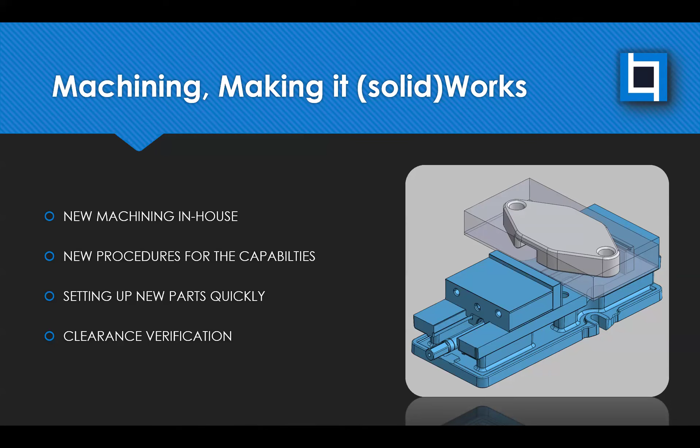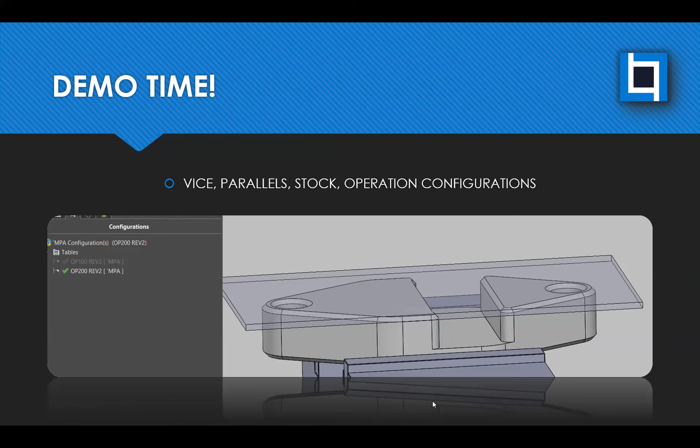But we still do a lot of setup in SolidWorks before exporting, and we do some possibly interesting things to show you guys what we do. So I'm going to go through that a bit, and then most of what I'll go into is just a demo in SolidWorks, talking about how we utilize our vise, parallel, stock, and operation configurations for programming. So I'll go ahead and pull it up here.

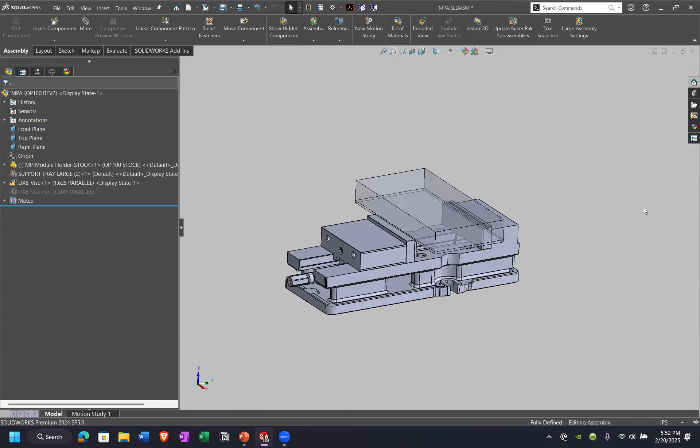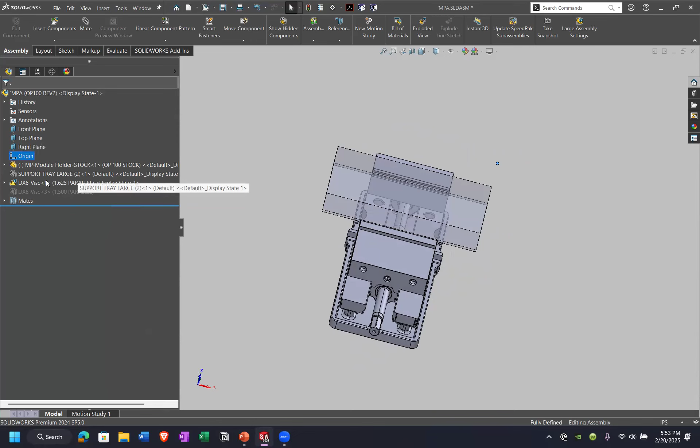This is essentially a model the way it would start. We have a template that looks a lot like this with no part in it—I just hid the part for a second—but this is essentially what we'd open as a starting template for our machine. It's got a piece of stock here, and everything is focused around the stock. The stock is fixed in place on the origin where we want it, which in this case we treat as the top right of the machine bed. Then we have our vise in here, which I'll suppress for a second.

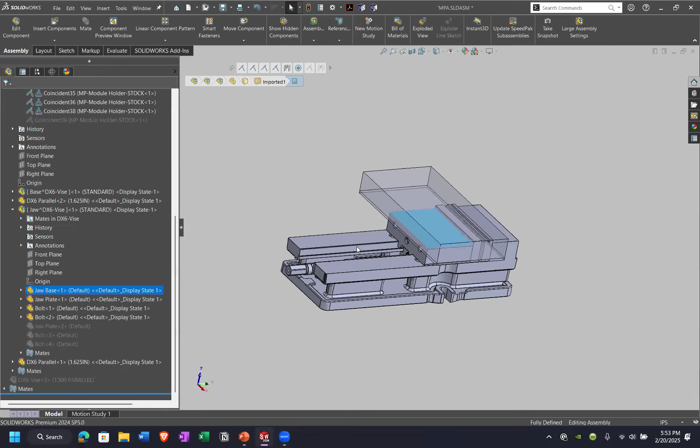It's set up as a flexible model so we can show clamping different objects and move things around as necessary. And just for reference, in case somebody doesn't know, I'll suppress this for a second—if you don't know what flexible is, if you've never used that.

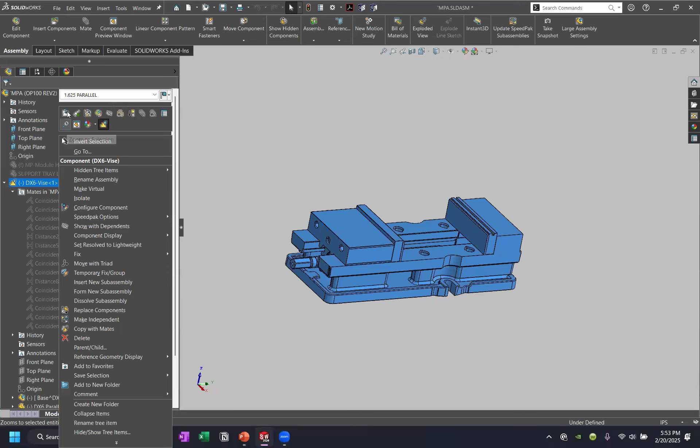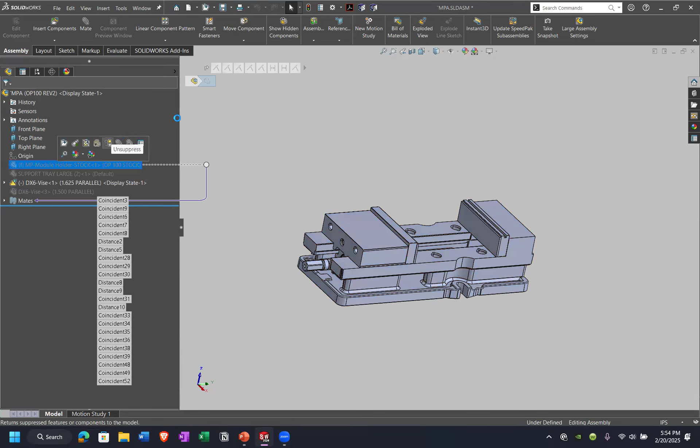That's this button right here, under your quick menu, make subassembly flexible. Essentially that allows you to take something within the assembly and move it around—this is inside this assembly, you can move it. But if you're in a higher level assembly where that would typically be locked in position because it's under a separate subassembly where that mate exists, you can actually make it flexible and it allows it to move like you're in that subassembly. Hopefully that makes sense.

So we move that around. I'm sorry, say that again? Door hinges? Yeah, door hinges and shocks, great examples. Yeah, basically subassemblies you're trying to move in a higher level assembly.

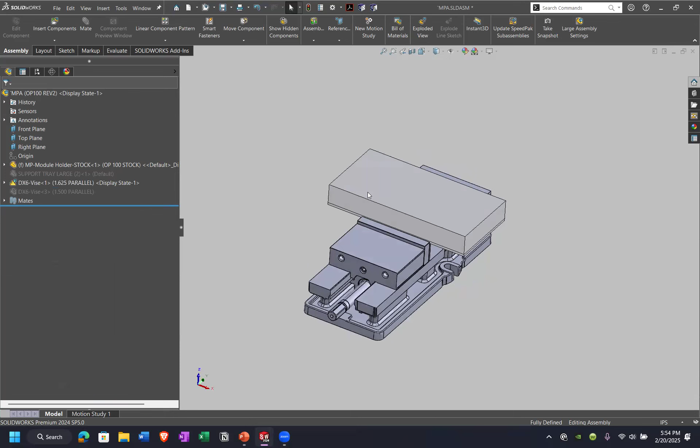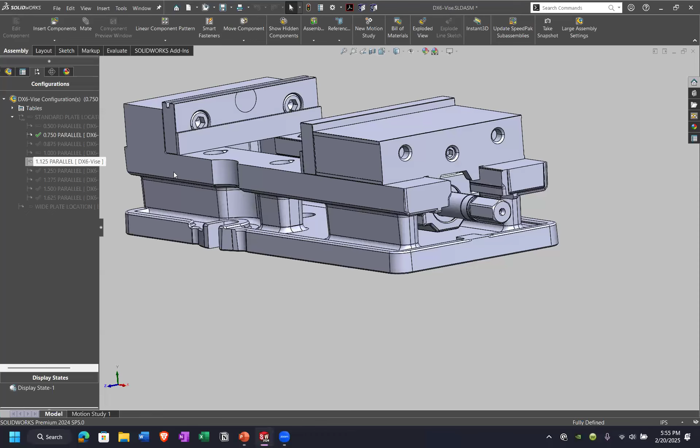So anyway, we have that as a flexible subassembly, and we also have it with multiple configurations built in—it's its own subassembly with built-in parallels for machining. These are our parallels, with different standard heights built into them, so we're basically accommodating all our different tooling already. It's not 100% comprehensive still—we're still working on some processes—but this has a lot of what we typically use for our setups, so we can quickly change to the different parallel configurations we have.

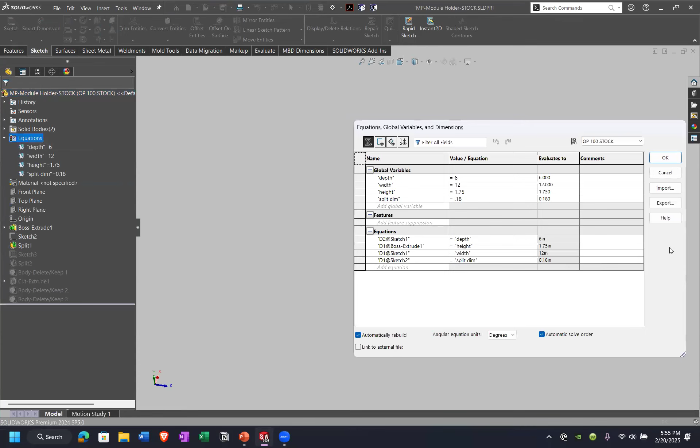For our stock, this is just what it sounds like—it's intended to be a stock piece of material, driven from equations. For example, if I wanted this to be a 12 by 12 for this part, I'd just change that equation, trying to make everything really fast and flexible for us. If this needed to be a 2-inch piece of stock, we just change these variables.

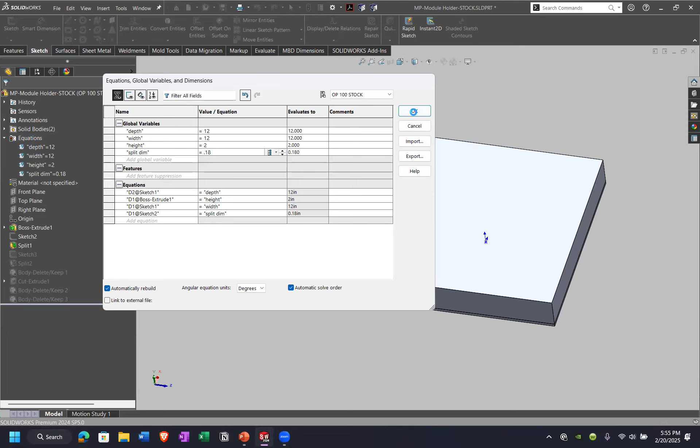One of the useful parameters here is where our split line is, because our split line, in this case, typically needs to be in relation to the part—if I show my part again.

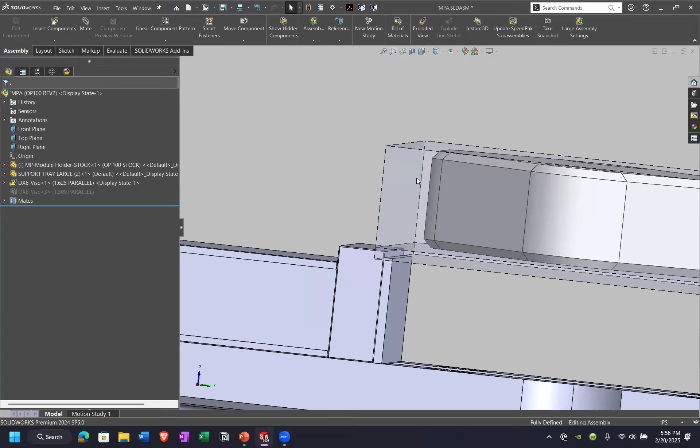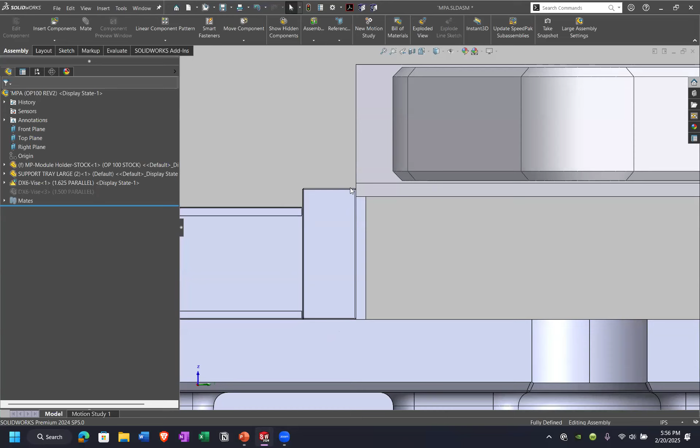The split line needs to be above the part so that we can face it, but above the edge of our vise. We don't want to collide with the vise while we're machining, particularly in this case because we're not machining steel. You especially don't want to hit it when you're machining plastic, because you'll tear up your tool.

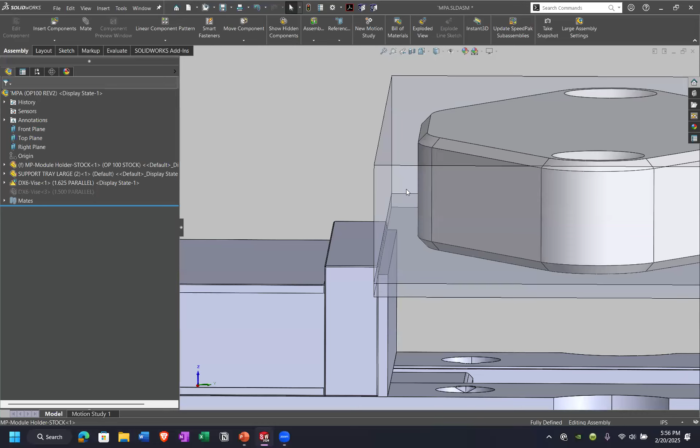So we need to have that line be in the right spot. That's another parameter we control in our stock, where that split line is going to be. For a simple part like this and a simple program like this, that's going to determine where our op1 and op2 split.

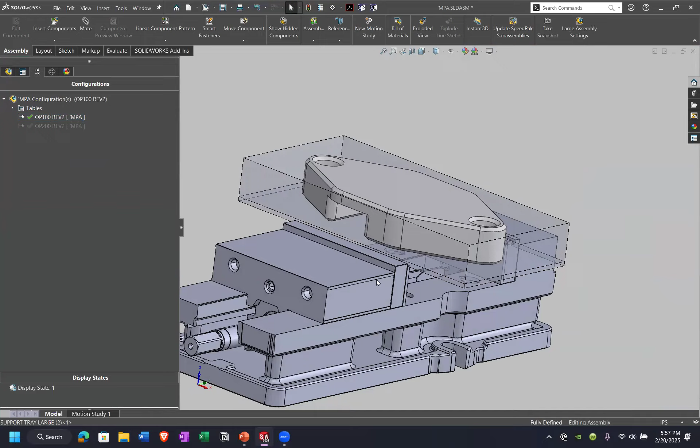With these configurations, we essentially mate our part in here where we're expecting it to sit in relation to the vise and the stock. In this case, I've just centered it on the stock, offset a bit from this top face so that we can actually face it and make sure we're getting a nice flat face, and then above that split line like I was saying.

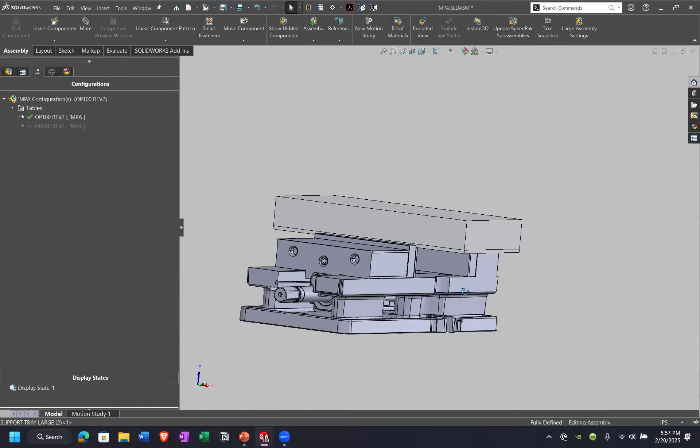Our op1 is essentially cutting that profile from stock, getting that done. Then when we go to op2, we have another vise dropped in, so the other vise is suppressed.

Everything's based around the stock and the part, versus actually treating the vise as the fixed reference. We actually treat the part as fixed, and there are some reasons for that.

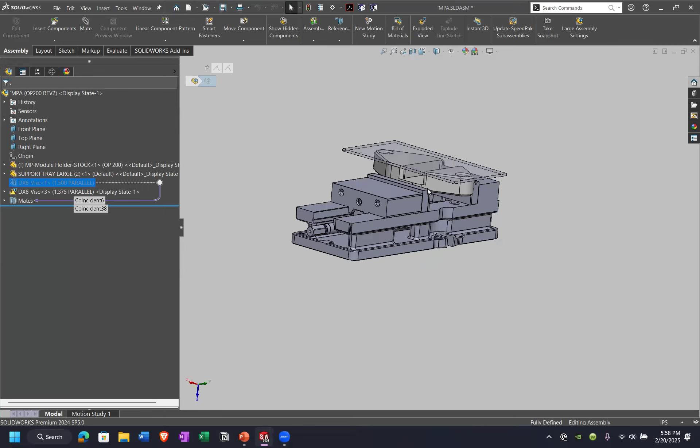It's easier for our pathing when we're importing multiple versions of this, because ultimately these will all get outputted as a step file and then overlaid, considering where the part is going to be and where our machine datum is, because the part is really put in relation to the machine datum.

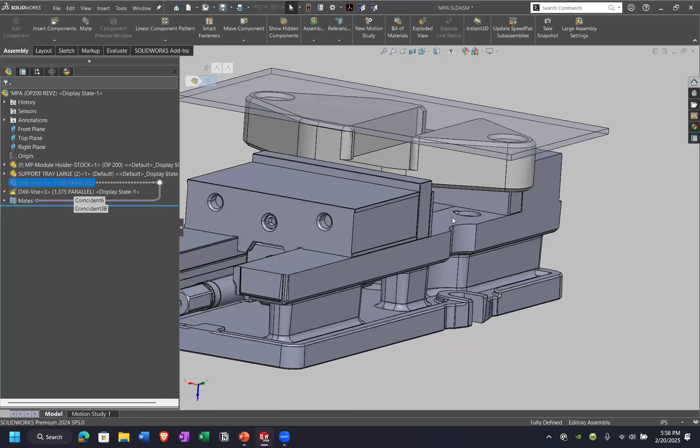Anyway, so op1 is done. Essentially, this part has all these features cut into it, and all we need to do is take off this part of the stock. Now in reality, this is a little bit of an imperfect representation because this pocket hasn't been cut yet. That will be cut.

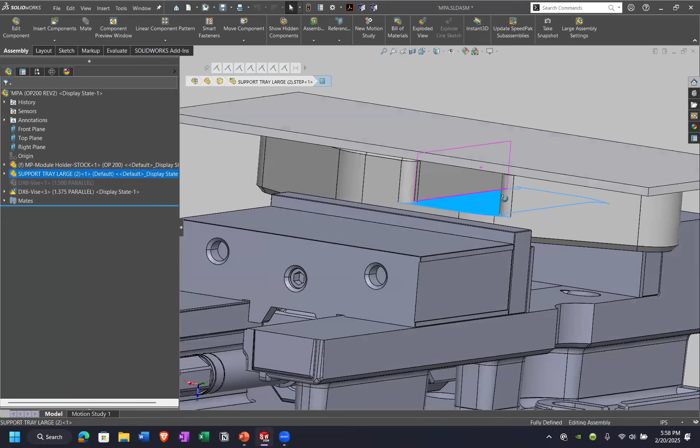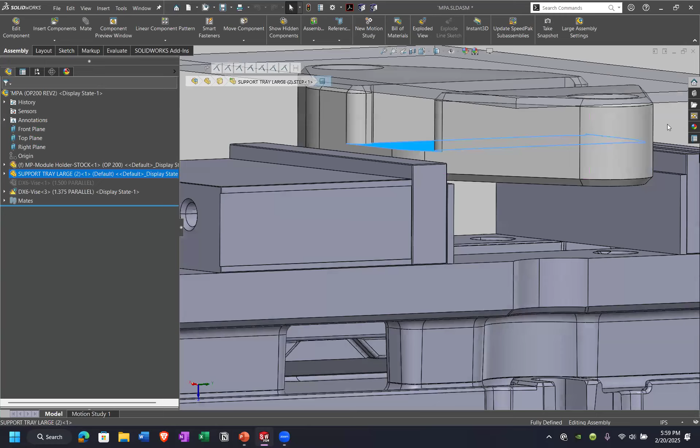This is a little bit of a simplistic version for us to just use to show the outer boundaries. I don't need to show that this would actually be full of material—for our purposes it's more of a visual demonstration, helping us verify clearances. So the fact that we don't show stock inside this pocket is sort of immaterial, but that is happening in this operation as well.

So then, essentially op2 would be facing this and taking that down. It's pretty simple, just op1, op2, a representation of how we put that together, and we output our files really quickly in SolidWorks. The designers can even do this.

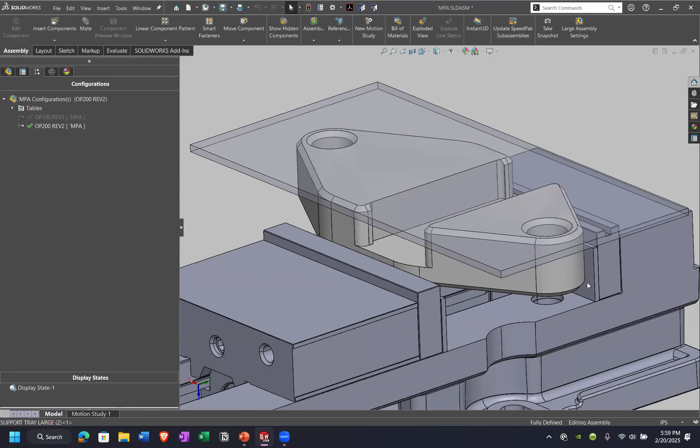The other reason we do this is designers can consider these factors quickly and put together this model without necessarily being the ones machining it, making sure they've considered things like what stock size we need. Maybe they originally thought they could get away with, say, 1 5/8 stock, and then they realize, now that I've put it in here, that doesn't give enough clearance.

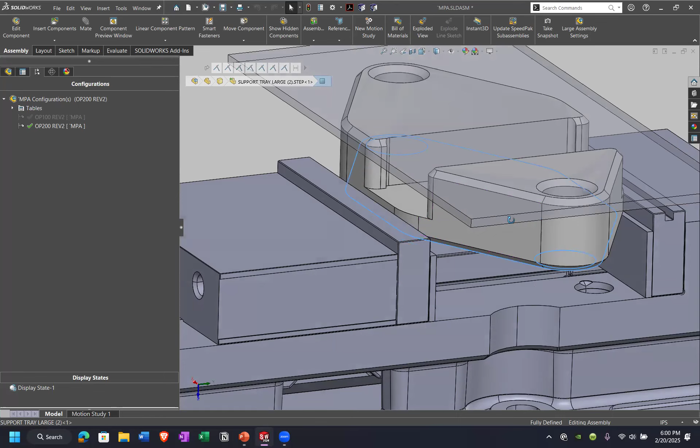So it's quick little models that they can output as steps and put into our programming files. Even though they're not necessarily going to program it—maybe another person will—this has already been considered, and it makes the machinist's job a lot easier. They already know the setup has been considered and what tooling they're going to need to use.

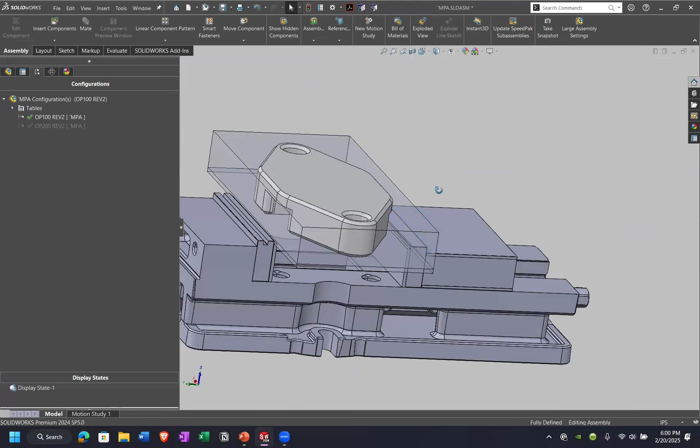And maybe there's some back and forth if they disagree and want to do something different, but there's a baseline created, and it helps the process a lot. So that's a quick overview of some stuff we're doing to try and optimize that new process.

Any questions? So, how long did it take you guys to pick up MasterCAM? That is an excellent question.

Actually not too bad. We had at least one person, well, multiple people on our team, with MasterCAM experience. One person in particular has like 20 years of MasterCAM experience, so he's quite an expert. That obviously helps.

But one of the people most involved with writing our programs right now hadn't done much in MasterCAM. Through having that expert knowledge base there already, a few quick videos, and a little trial and error, he was able to pick up a lot of what we need very quickly.

We're not doing 5-axis, really intense stuff. Mostly what we're trying to do is quick prototypes, just 3-axis, fairly simple parts. So it hasn't gotten too crazy yet, but yeah, we picked it up pretty quick overall.

So you're saying SolidWorks CAM is not supported anymore? Or HSMWorks? MasterCAM within SolidWorks, I believe, is no longer being updated. SolidWorks CAM is still available and still going, as far as I know.